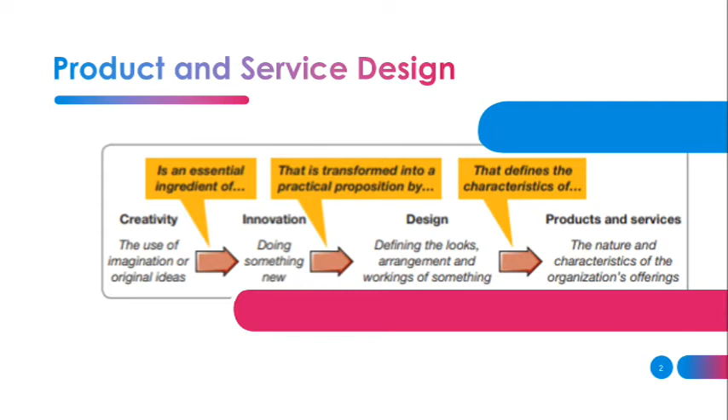Product design defines a product's characteristics such as its appearance, the material it is made of, its dimensions and tolerances, and its performance standards. Certain steps are common to the development of most product designs: idea generation, product screening, preliminary design and testing, and final design.

All product designs begin with an idea. The idea might come from a product manager, customer, competitors, or suppliers. To remain competitive, companies must be innovative and bring out new products regularly.

After a product idea has been developed, it is evaluated to determine its likelihood of success, referred to as product screening. The company's product screening team evaluates the product design according to the needs of the major business functions.

Once a product idea has passed the screening stage, it is time to begin preliminary design and testing. At this stage, the design engineers translate the general performance specifications into technical specifications.

Prototypes are built and tested. Changes are made based on the test results, and the process of revising, rebuilding a prototype, and testing continues.

Following extensive design testing, the product moves to the final design stage. This is where the product specifications are drawn up. The final specifications are then translated into specific processing instructions to manufacture the product.

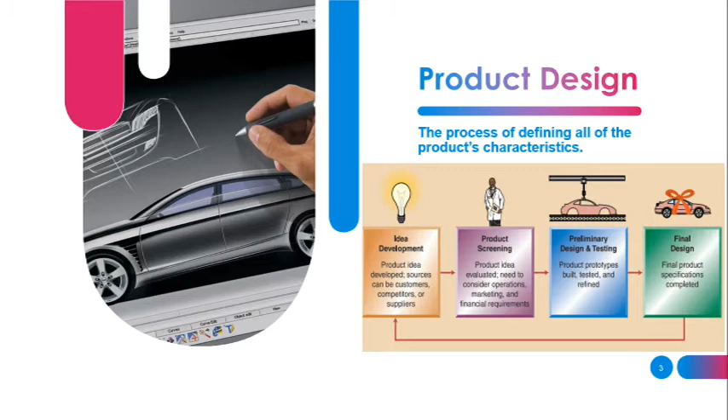This includes selecting the equipment, outlining jobs that need to be performed, identifying specific materials needed and suppliers that will be used, and all other aspects of organizing the process of product production.

Designing for manufacture is a series of guidelines that we should follow to produce a product easily and profitably. Design simplification means reducing the number of parts and features of the product whenever possible. A simpler product is easier to make, costs less, and gives higher quality.

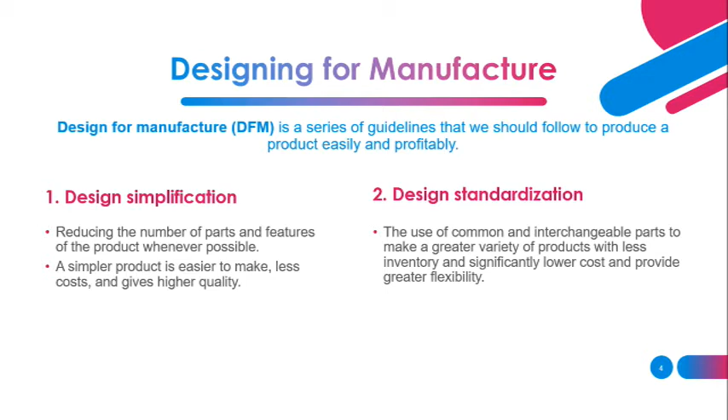Design standardization refers to the use of common and interchangeable parts. By using interchangeable parts, we can make a greater variety of products with less inventory and significantly lower cost, and provide greater flexibility.

Advantages of standardization are: fewer parts to deal with in inventory and manufacturing, reduced training cost and time, more routine purchasing, handling, and inspection procedures, orders fillable from inventory, opportunities for long production runs and automation, and the need for fewer parts justifies increased expenditures on perfecting designs and improving quality control procedures.

Disadvantages of standardization are: designs may be frozen with too many imperfections remaining, high cost of design changes increases resistance to improvements, and decreased variety results in less consumer appeal.

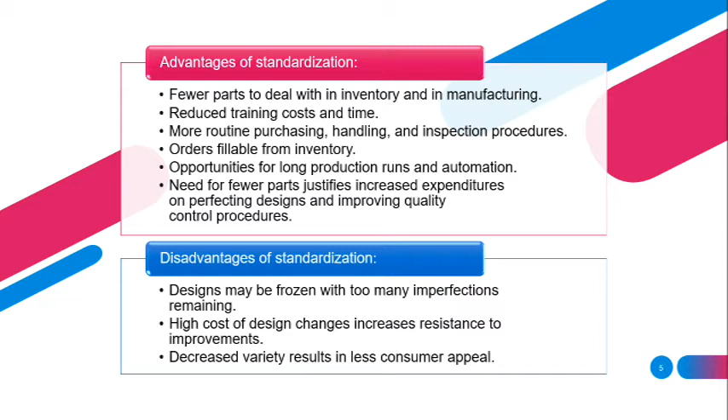Service design is the process of establishing all the characteristics of the service, including physical, sensual, and psychological benefits.

Phases in the service design process: Conceptualize - idea generation, assessment of customer wants and needs, and assessment of demand potential.

Identify service package components needed. Determine performance specifications. Translate performance specifications into design specifications. And translate design specifications into delivery specifications.

Service blueprinting is a method for describing and analyzing a service process. It is a useful tool for conceptualizing a service delivery system as it shows the basic customer and service actions involved in the service operation.

The major steps in service blueprinting are as follows: establish boundaries for the service and decide on the level of detail needed, and identify and determine the sequence of customer and service actions and interactions.

Develop time estimates for each phase of the process as well as the time variability. Identify potential failure points and develop a plan to prevent or minimize them, as well as a plan to respond to service errors. Guidelines for successful service design help the business to define the service package in detail, and focus on the operation from the customer's perspective.

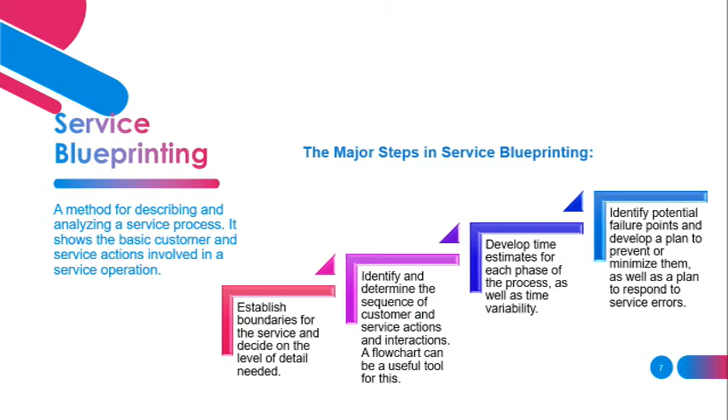Phases in product design and development. First is to identify customer wants - what do the customers want in this product? Feasibility analysis entails market analysis, economic analysis, and technical analysis. It is necessary to answer the question: does it fit with the mission? It requires collaboration among marketing, finance, accounting, engineering, and operations.

Then, identify how the goods or service will satisfy the customer wants. Identify the specific product characteristics, features, or attributes and show how well they will satisfy the customer wants. Product specifications involve detailed description of what is needed to meet or exceed the customer wants, and require collaboration between legal, marketing, and operations.

Then, we review the design of the product by developing a prototype. Prototype development is made to see if there are any problems with the product or process specifications. Design review: at this stage, any necessary changes are made. Marketing, finance, engineering, design, and operations collaborate to determine whether to proceed or abandon.

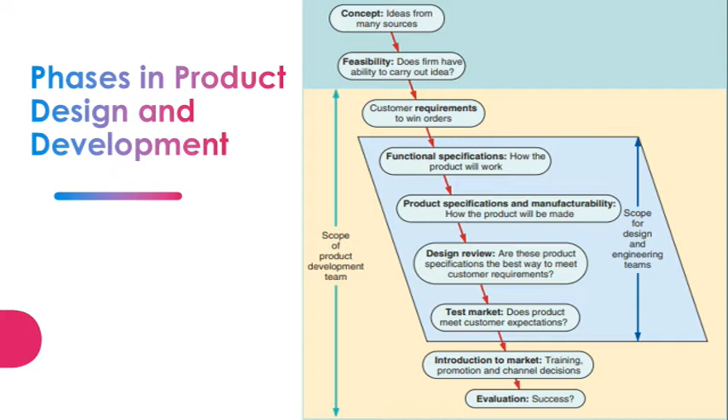Concurrent engineering means bringing the design and manufacturing engineering people together early in the design phase to simultaneously develop the product and process for creating the product. Key advantages are manufacturing personnel are able to identify production capabilities and capacities. Design or procurement of critical tooling can occur early in the process, resulting in a major shortening of the product development process, which could be a key competitive advantage.

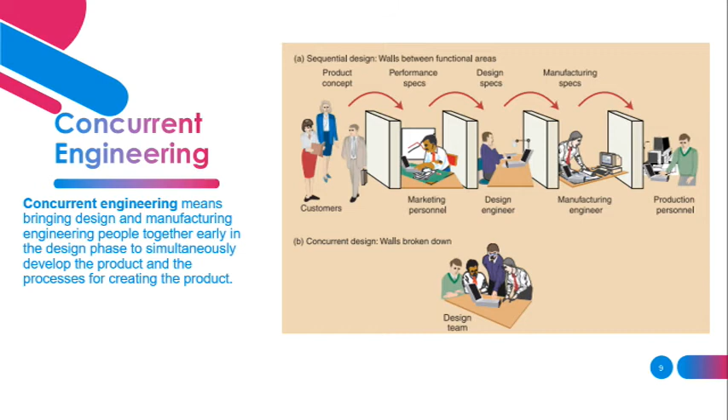A technical feasibility of a particular design or a portion of a design can be addressed early to avoid serious problems during production, and the emphasis can be on problem resolution instead of conflict resolution. Production requirements: when opportunities and capabilities do not match, management must consider the potential for expanding or changing capabilities to take advantage of those opportunities. Manufacturability is a key concern for manufactured goods, meaning that ease of fabrication and/or assembly is important for cost, productivity, and quality.

Design for manufacturing is used to indicate the designing of products that are compatible with an organization's capabilities. Design for assembly: a good design must take into account not only how the product will be fabricated, but also how it will be assembled. Design for assembly focuses on reducing the number of parts in an assembly, as well as on the assembly methods and sequence that will be employed.

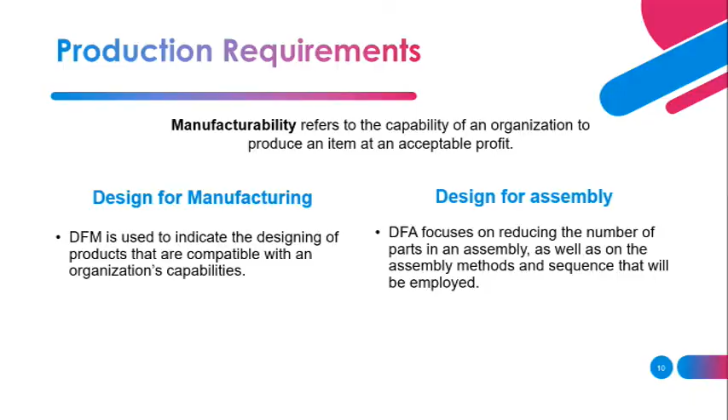Documents for production. Once a product is selected, designed, and ready for production, production is assisted by a variety of documents. An assembly drawing simply shows an exploded view of the product, usually a three-dimensional drawing known as an isometric drawing. The relative locations of components are drawn in relation to each other to show how to assemble the unit.

The assembly chart shows a schematic form for how a product is assembled. The chart identifies the point of production at which components flow into sub-assemblies and ultimately into a final product. The route sheet is the list of operations necessary to produce the component with the materials specified on the bills of materials.

The route sheet for an item will have one entry for each operation to be performed on the item. The work order is an instruction to make a given quantity of a particular item, usually to a given schedule. The ticket that the waiter writes at your favorite restaurant is a work order. In a factory, the work order is more formal - documents that provide authorization to draw items from inventory, to perform various functions, and to assign personnel to perform these functions.

Engineering change notices affect some aspect of the product's definition or documentation, such as an engineering drawing or a bill of material. For a complex product with a long manufacturing cycle, such dynamic design change has fostered the development of a discipline known as configuration management. This is concerned with product identification, control, and documentation—a system by which the product's planned and changing configurations are accurately identified, and for which control and accountability of change are maintained.

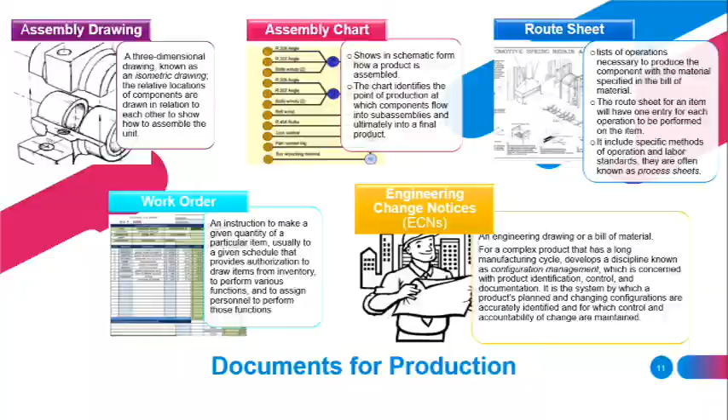Process selection refers to deciding how the production of goods or services will be organized. It occurs as a matter of course when new products or services are being planned, or periodically due to technical changes in products or equipment, as well as competitive pressures. Key aspects include capital intensity and process flexibility.

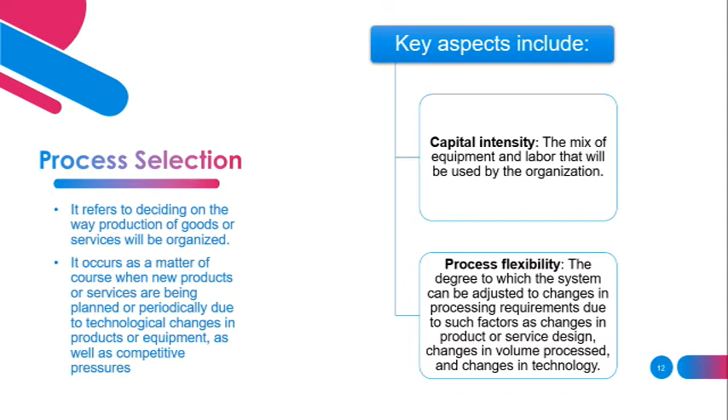Capital intensity refers to the mix of equipment and labor that will be used by the organization. Process flexibility refers to the degree by which the system can be adjusted to changes in processing requirements, due to such factors as change in product or service design, changes in volume processed, and changes in technology.

Process types are found in a wide range of manufacturing and service settings. The idea is to have process capabilities match the product or service requirements. Failure to do so can result in inefficiencies and higher costs than necessary, perhaps creating a competitive disadvantage.

Job shops deal with high variety and low volumes. Each product has to share the operation's resources with many others. Each resource will process a series of items, but although each one requires similar attention, they may differ in their exact needs. Many jobs will probably be one-offs that are never repeated. Job processes could be relatively complex; however, they usually produce physically smaller products, and although sometimes involving considerable skill, such processes often involve fewer unpredictable circumstances.

Examples of job shops include made-to-measure tailors, precision engineers such as specialist tool makers, furniture restorers, and a printer who provides tickets for a local social event.

Batch processing may look like a job shop but does not have the same degree of variety. As the name implies, each time batch processes run, they produce more than one item at a time. Batch processes are used to produce small quantities of products in groups or batches, based on customer orders or product specifications. The volumes of each product produced are still small, and there can still be a high degree of customization. Examples can be seen in bakeries, education, and printing shops.

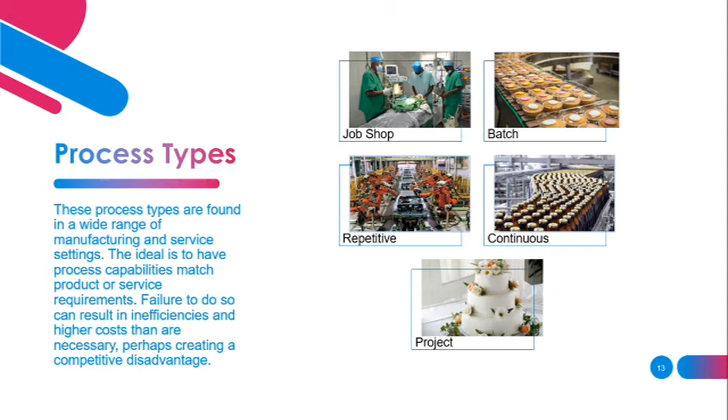Project processes are used to make one-of-a-kind products exactly to customer specification. These processes are used when there is high customization and low product volume, because each product is different. Examples can be seen in construction, shipbuilding, medical procedures, creation of artwork, custom tailoring, and interior design. With project processes, the customer is usually involved in deciding the design of the product.

Layout refers to the configuration of departments, work centers, and equipment, with particular emphasis on movement of work through the system. The basic objective is to facilitate a smooth flow of work, material, and information through the system.

Supporting objectives generally involve the following: to facilitate attainment of product or service quality, to use workers and space efficiently, to avoid bottlenecks, to minimize material handling costs, to eliminate unnecessary movement of workers or materials, to minimize production time or customer service time, and to design for safety.

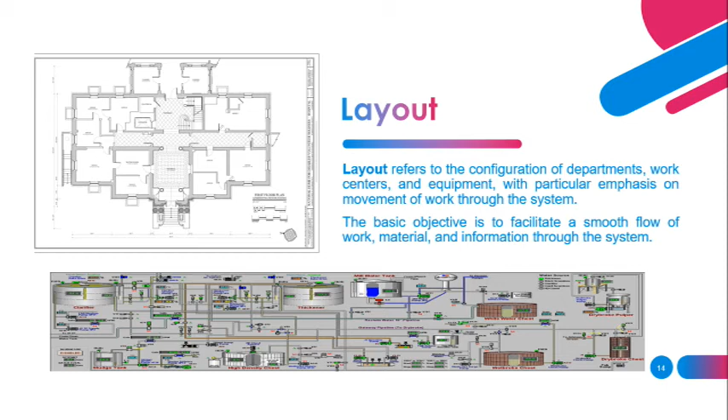There are five types of layout: product layout, process layout, hybrid layout, fixed position layout, and service layout.

Product layouts arrange resources in a straight line fashion to promote effective production. They are called product layouts because all resources are arranged to meet the production needs of the product. This type of layout is used by companies with repetitive processing systems that produce standardized products in large volumes. Examples are seen in assembly lines, cafeterias, or even at a car wash. In product layouts, material moves continuously and uniformly through a series of workstations until the product is complete.

The challenge in designing the product layout is to arrange workstations in sequence and designate the jobs that will be performed by each station in order to produce product in the most efficient way possible. Operation managers must decide exactly what tasks will be performed by every workstation in the sequence.

They need to consider the logical order in which jobs should be done. They also need to consider how fast production occurs and how many units can be processed through the system. The faster the production occurs, the more units can be processed.

Process layouts are layouts that group resources based on similar processes or functions. This type of layout is seen in companies with intermittent processing systems in which a large variety of items are produced in a low volume.

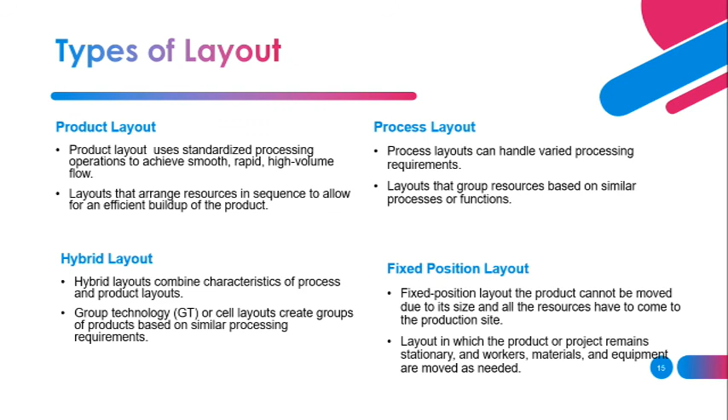Service layout. There are five types of service layout: warehouse layout, retail layout, office layout, restaurant layout, and hospital layout.

The objective of warehouse layout is to find the optimum trade-off between handling cost and costs associated with warehouse space. Consequently, the manager's task is to maximize the utilization of the total cube of the warehouse, that is, utilize its full volume while maintaining low material handling costs.

We define material handling costs as all costs related to the transaction. This consists of incoming transport, storage, and outgoing transport of the materials to be warehoused. These costs include equipment, people, material, supervision, insurance, and depreciation. Effective warehouse layouts also minimize the damage and spoilage of materials within the warehouse.

Retail layouts are based on the idea that sales and profitability vary directly with customer exposure to products. Thus, most retail operation managers try to expose their customers to as many products as possible. Studies show that the greater the rate of exposure, the greater the sales and the higher the return on investment. The operations manager can change exposure with store arrangement and the allocation of space to various products within that arrangement.